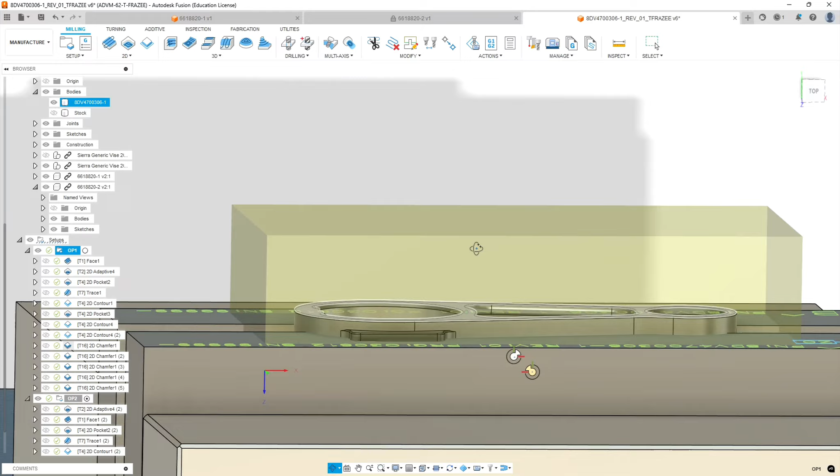Okay, so those are contours. Now we did a series of pockets. Those don't need to be done over. Then we have our 2D contour here, which would be to cut - we've got this little tab here that needs to be machined. So from the side we're on, that right now is solid.

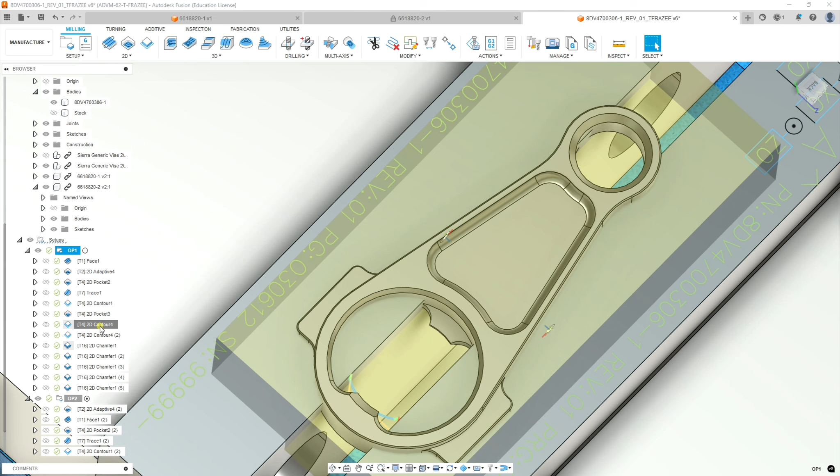Okay, so we're going to take - this was the pocket we don't need to do. Then we got this contour here we need to duplicate. So we're going to highlight it, right click, copy. We're going to come down to op 2, and then we're going to paste.

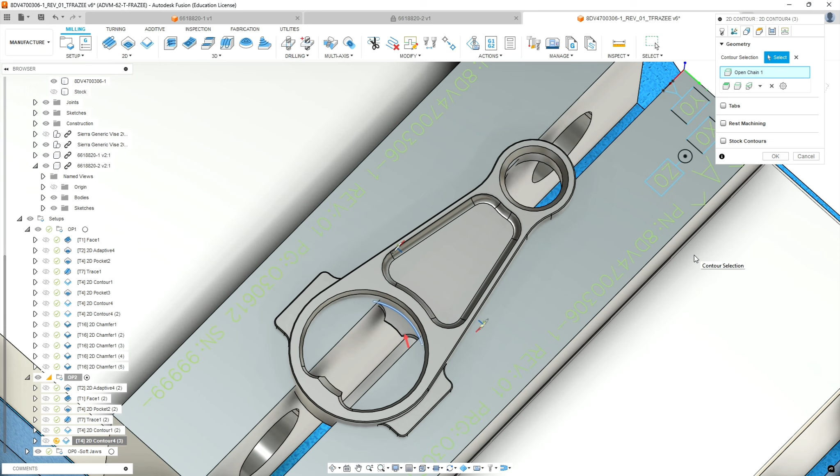And then we need to regenerate that on this side of the part. So we're going to go edit, go to geometry. We're going to clear the selection that was on the other side of the part. We're going to select the tab that is on this side of the part. Make sure the arrow's on the inside of the arc.

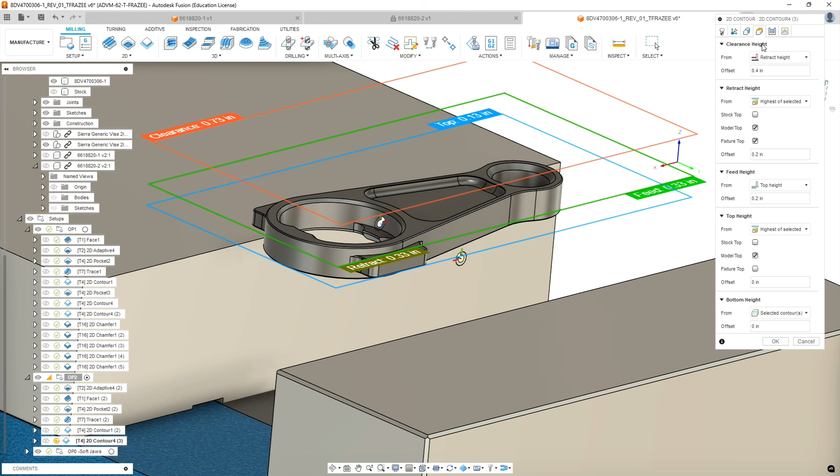At this point, we might actually want to hide the soft jaws to see what we're actually cutting. Okay, on the heights tab we're going to select a contour, so that's good. Our passes, we're going to leave all that default. It should be the same depth as the other side. And our linking tab, we're going to leave everything at default.

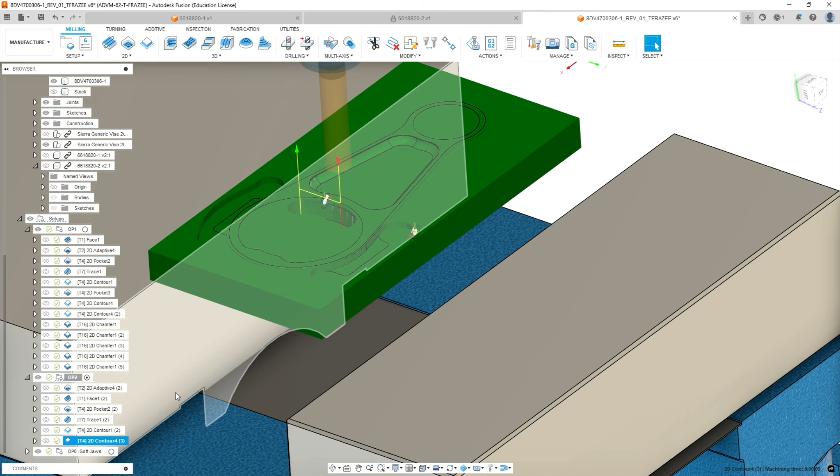Okay, so now we've got the cut on the inside of there. We've already machined around the outside of the part, so we don't need to do that. If we look at our op 1, we did our facing, our adaptive, we've done our pockets, we did our trace, we did the contour on the inside. This contour on the outside is already cut all the way around the part, so we don't need to do that. Now we're at the chamfering routines.

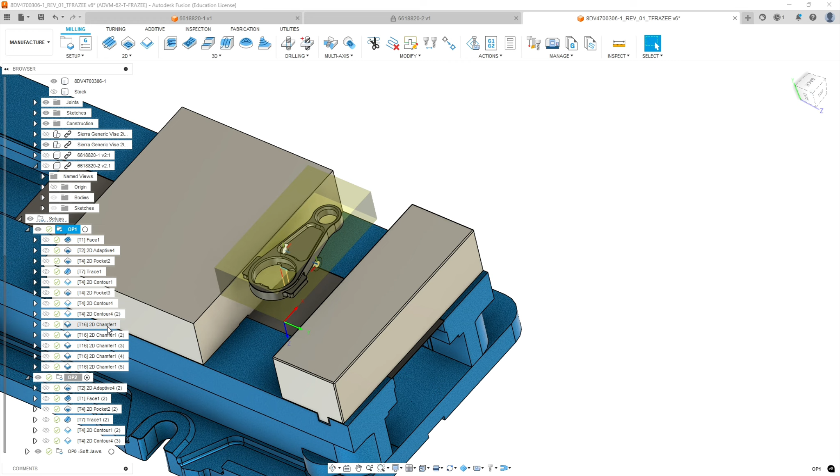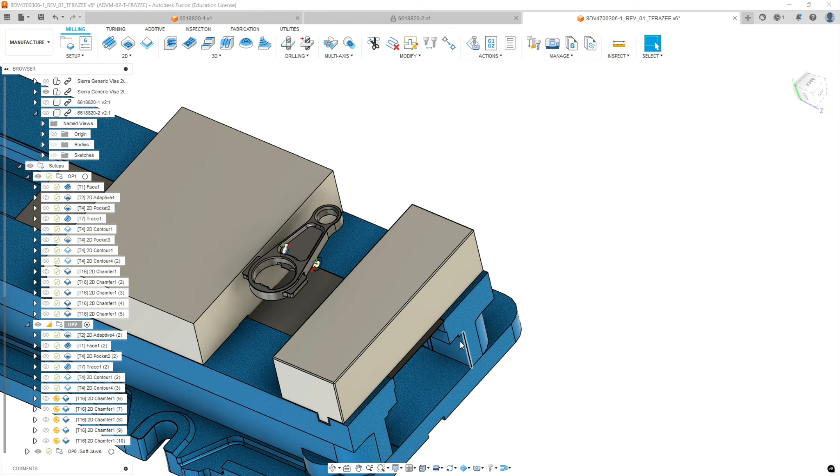So let's start with chamfer 1, and then hold the shift key down on your keyboard and grab all of those chamfers. Then we're going to right click and go copy. We're going to select op 2, right click, and paste. So we have a list of all our chamfers in order that we need to do on the opposite side. Now here the selection is going to perhaps be different than what I did on the other side.

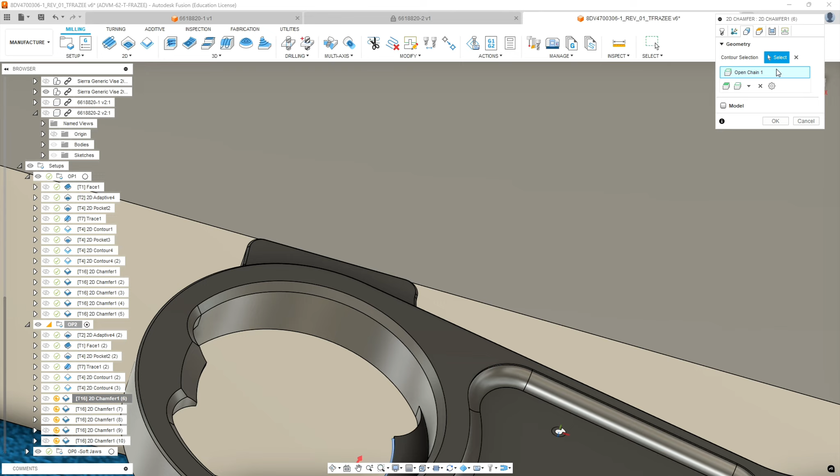Okay, so let's go for the first chamfer. We're going to go edit. And we went deepest first, so that chamfer was this edge here alone. So we're going to keep everything default. We're going to go to geometry. On my previous selection, I was able to select the bottom of the chamfer - that might not work, we will see.

So clear. Now we're going to select the chain option over here. This allows us to do an open chain, so we're not going all the way around. And then we're going to just pick the one little edge there. And then we're going to hit OK.

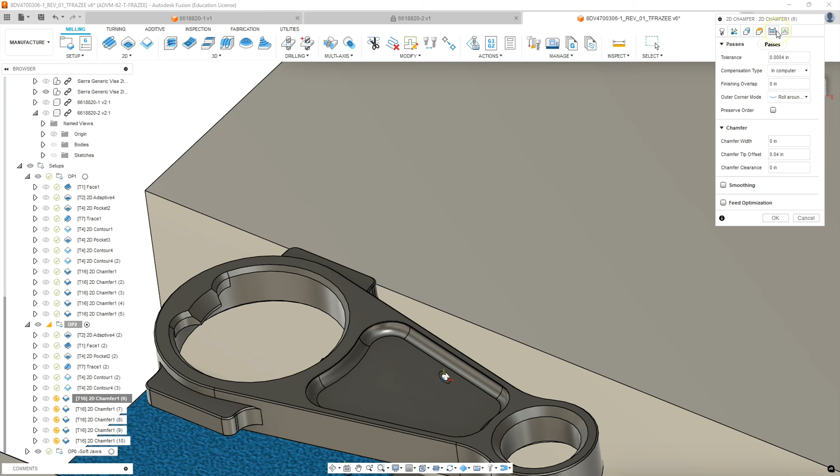And then we're on our heights. This all should be default. This should be all default. And this should be all default. Let's hit OK and see what it does. And it did it. Okay, it's not really diving into there like that - this is all relieved out, so it's only cutting on the chamfer edge.

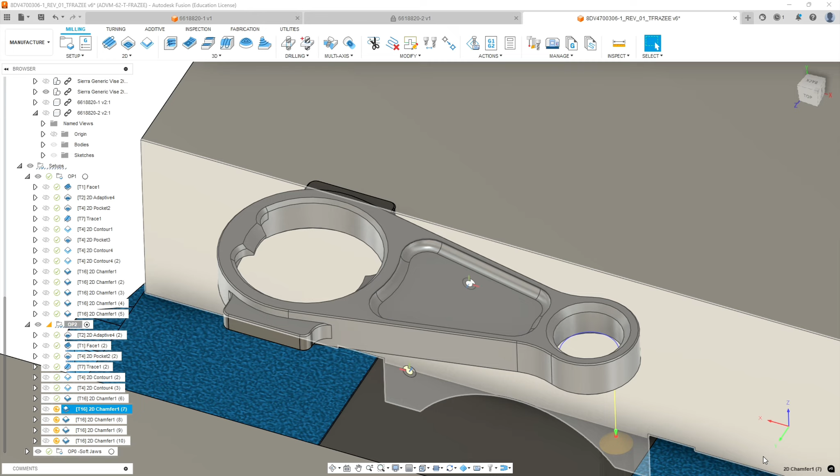All right, let's go to our next one. Okay, this routine was cutting the chamfer on the other side of this hole, so let's regenerate that one. Edit, regenerate. And everything stays default there. It looks like I selected the bottom of the chamfer, so we're going to follow suit there. Arrow should be on the inside. Default, default, default. Hit OK.

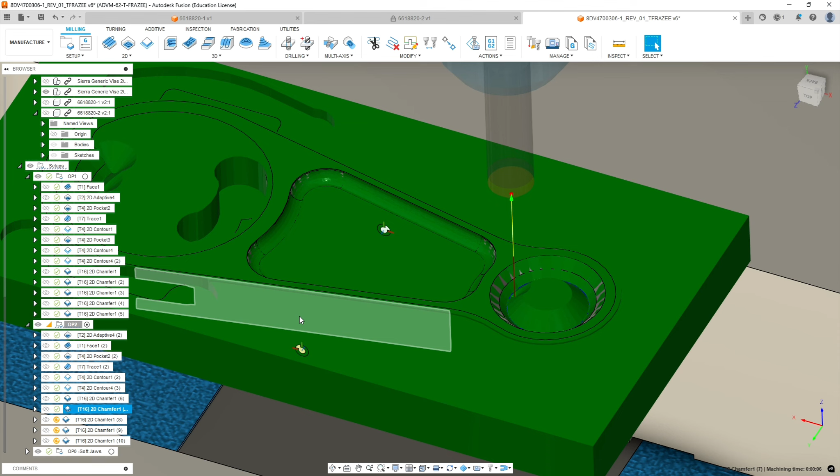All right, so we got our next chamfer. Now we're going to do this one. That was the chamfer of the inside rim of this, minus this part.

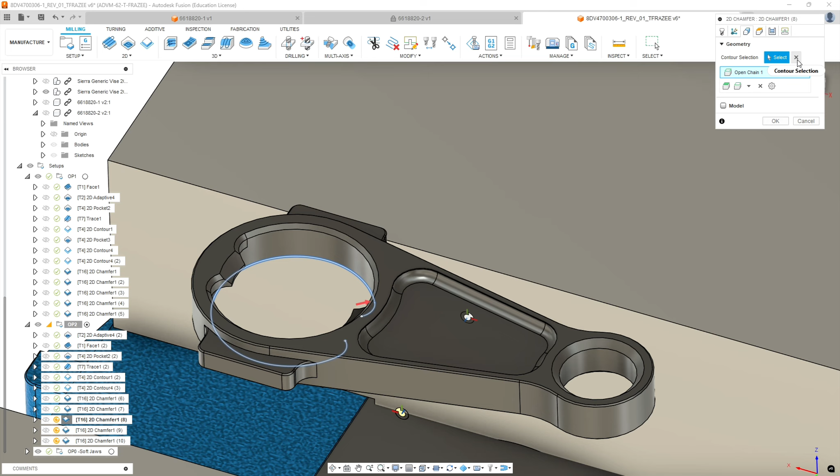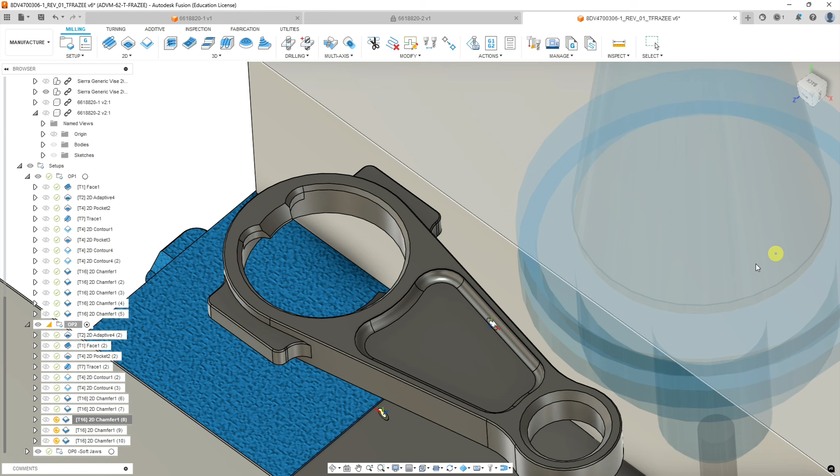So we're going to go edit, go to the geometry tab, and you see how it's an open chain. So we're going to clear that, and we're going to pick on chain, and go to open chain. We're going to select on the bottom, but we want an open chain, so I'm selecting the bottom edge, and the chain wraps around. Hit OK. Heights tab, as long as it says selected contours, we're good. We're going to go to passes, leave that at default. Linking, leave that at default. Hit OK, and we now have the chamfer around that edge.

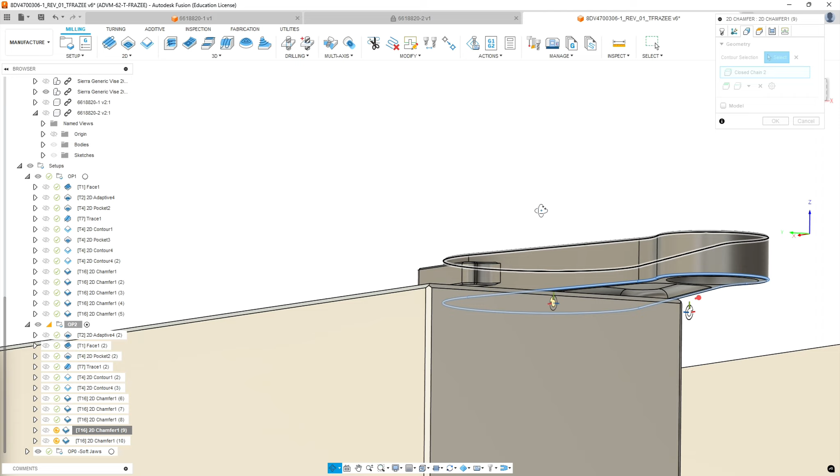Alright, I believe we only have 2 more left. We're going to go to the chamfer that goes around the outside rim. Edit, leave this at default. Geometry - I picked what appears to be the lower edge, so we're going to clear that, select the lower edge. Again, at the time this is recorded, we've had problems with the chamfer tool - sometimes you can't select the bottom edge, you've got to do the top edge. So you do what works.

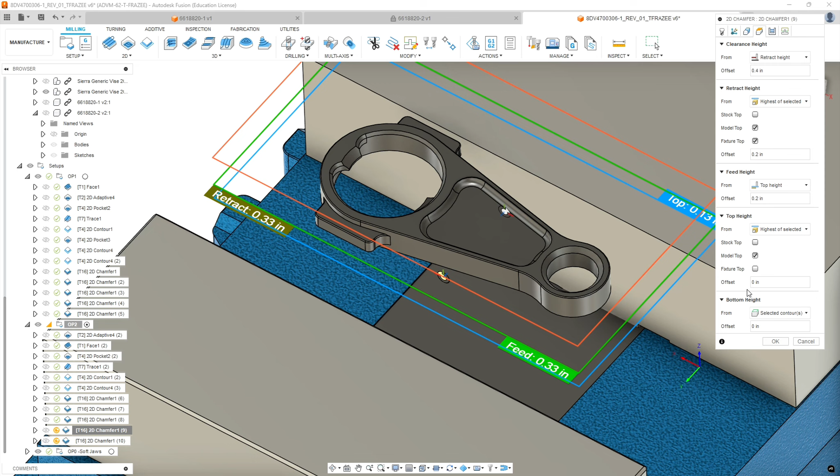Okay, we're going to go to the heights, we're going to leave these at default. Passes, default. Linking tab, default. Hit OK. Alright, we have one left, and it's the chamfer on these top edges. On this one, I had to select the top - I couldn't select the bottom.

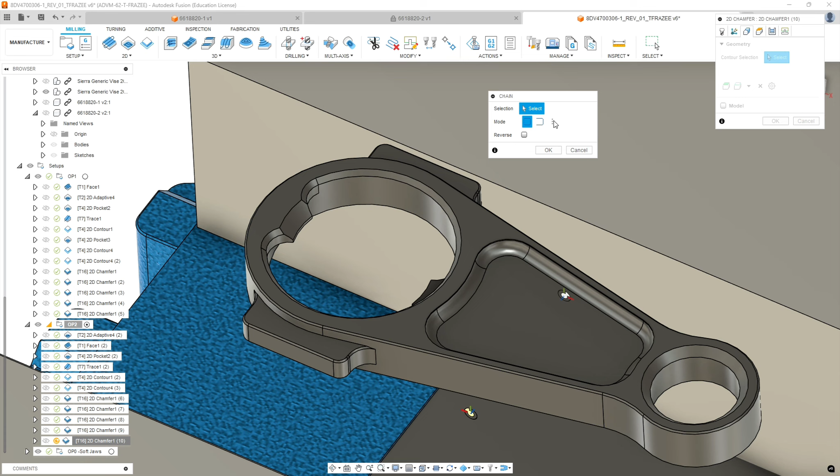So we're going to go to Edit, go to Geometry. We're going to clear the selection. We're going to go to Open Chain. Get our first selection. That's interesting.

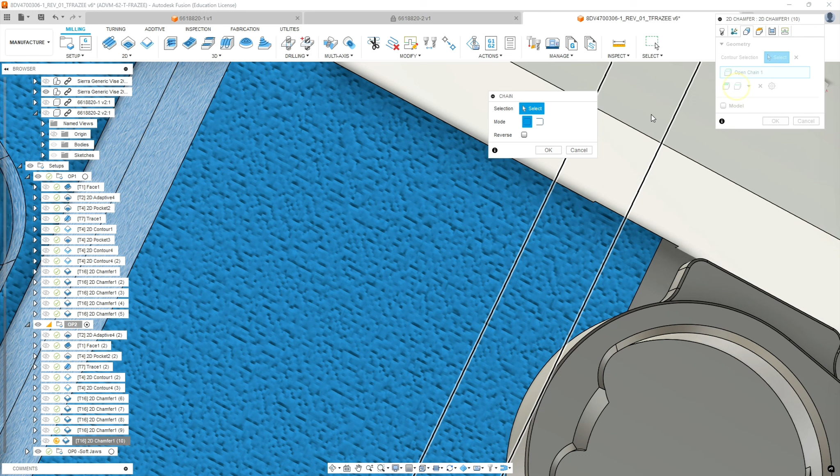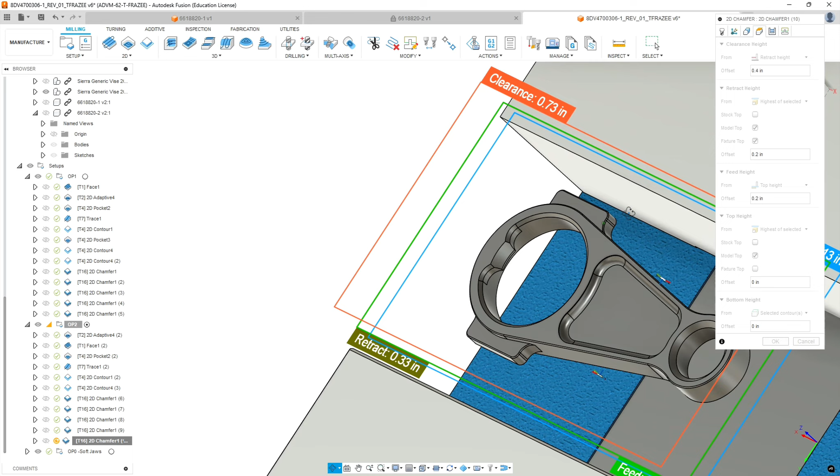Okay, and then we go to our heights. As long as it says selected contours, that's at default. Passes, default. Linking, default. Hit OK. And we get as much of the chamfer as it will cut.

Okay, that's it for programming the 8DV4700306-1 part.

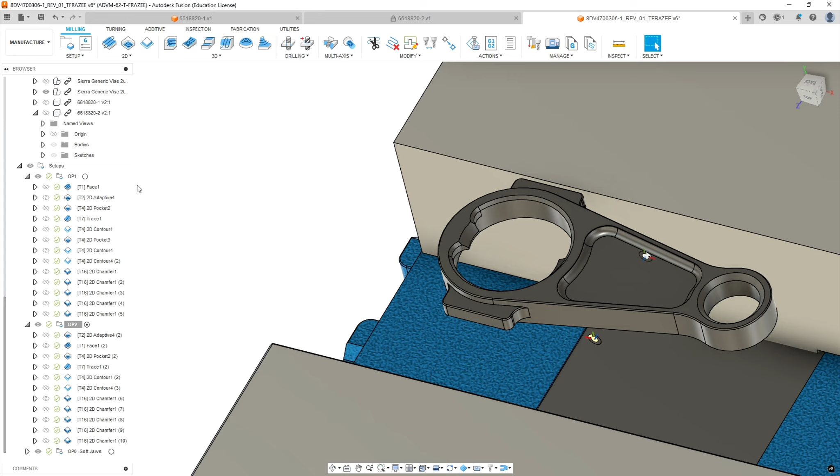So make sure you make your setup sheets that show the part in the orientation with origin, how it should be set up. We got to see this axis now, and you'll need to make everything visible again so that you can see it. So you should have 3 programs and 3 sets of setup sheets for this part.